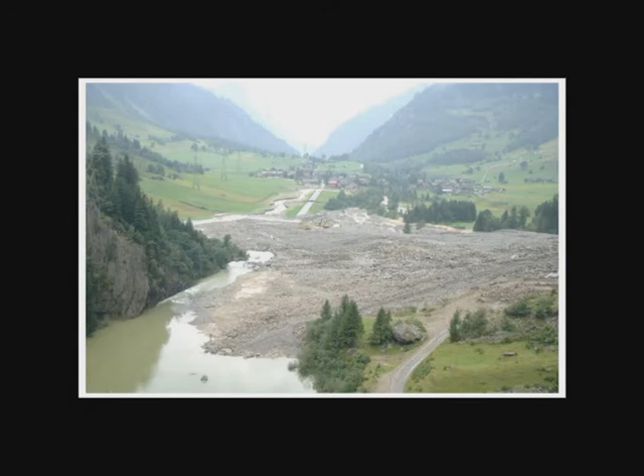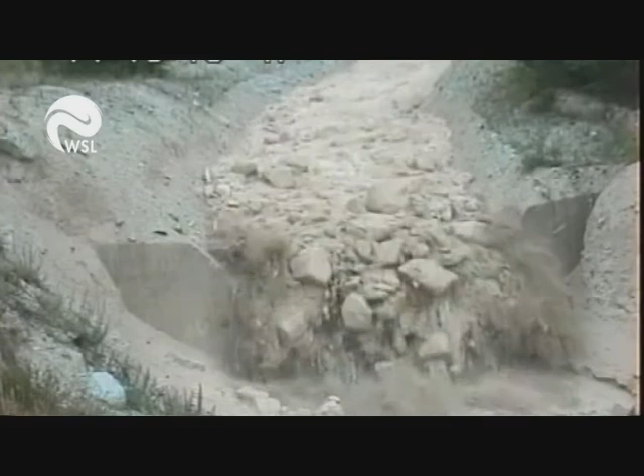The safety of persons and property is constantly under threat in mountainous regions due to natural events such as floods, debris flows, landslides, rockfalls, and avalanches. In just a short time, such events can lead to deaths, injuries, the destruction of property, and ecological damage. Using this combined knowledge and experience, we can verify and further develop scientific theories.

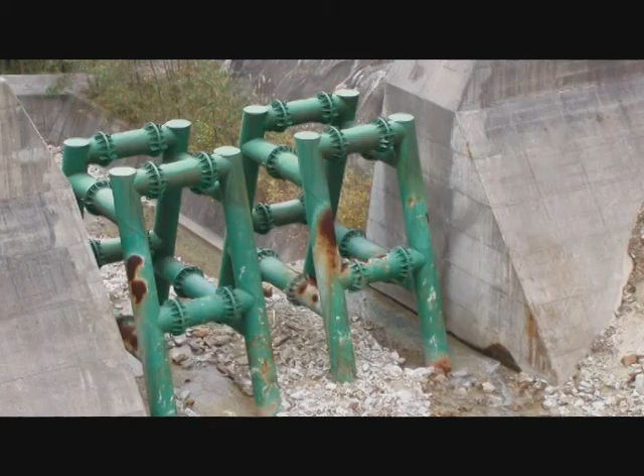A debris flow is a fast-flowing mixture. Various solution concepts exist to reduce the destructive effect of debris flows. For instance, metal girders were installed in a torrent to separate debris and water. But because they are not flexible, they can be easily destroyed by large boulders.

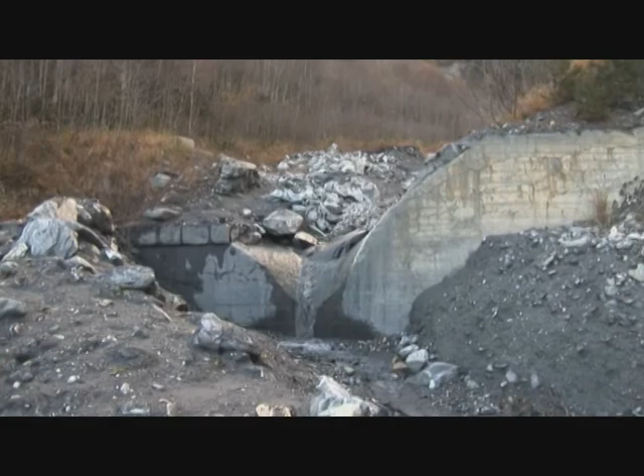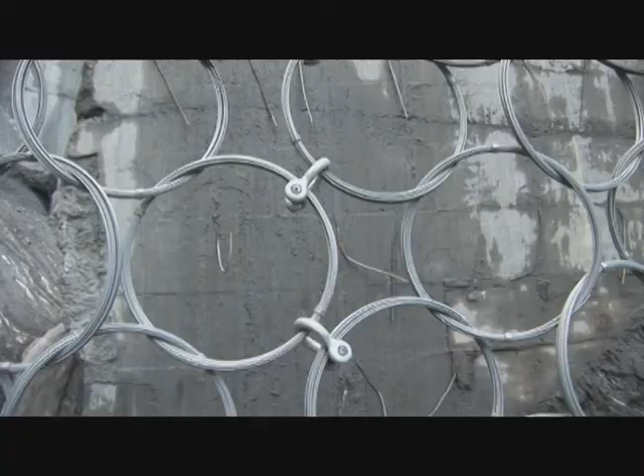Often an attempt is made to stabilize the torrent bed with concrete check dams. The idea is to break the debris flow and thereby reduce its energy. With this system, though, the abrasive effect of the debris results in an unsatisfactory service life. The latest and most promising technique uses ring nets. Just as with a tea strainer, water is drawn off, leaving behind the solids and causing the mixture to come to a stop.

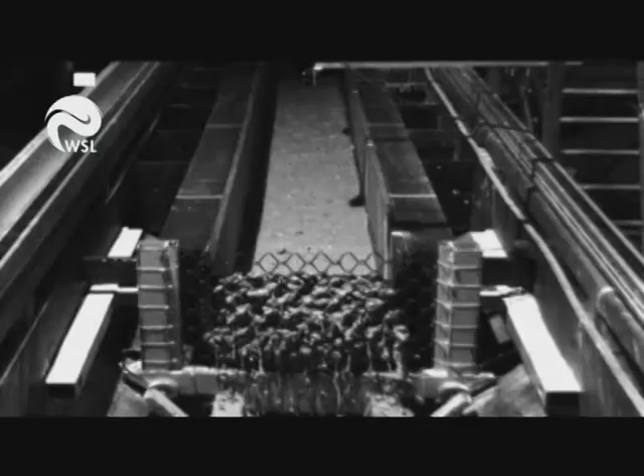Geobrugg in Romanshorn collaborates closely with WSL. It manufactures the world's strongest ring net systems, which have been installed for test purposes in a debris flow barrier. The results from the Illgraben debris flow test site in Switzerland have been positive. The barrier was filled to the brim by a muddy debris flow event, retaining approximately 1,000 cubic meters of debris.

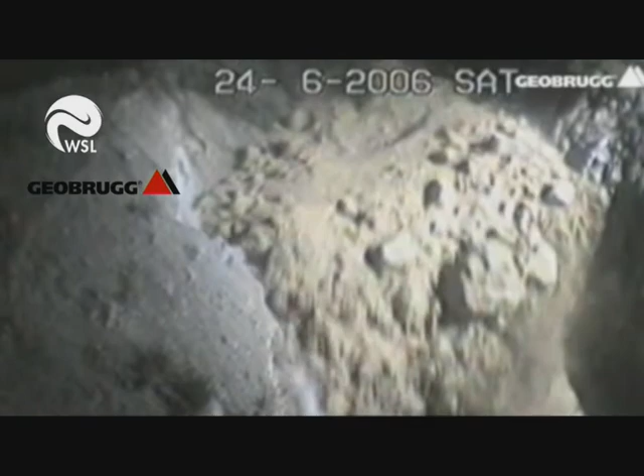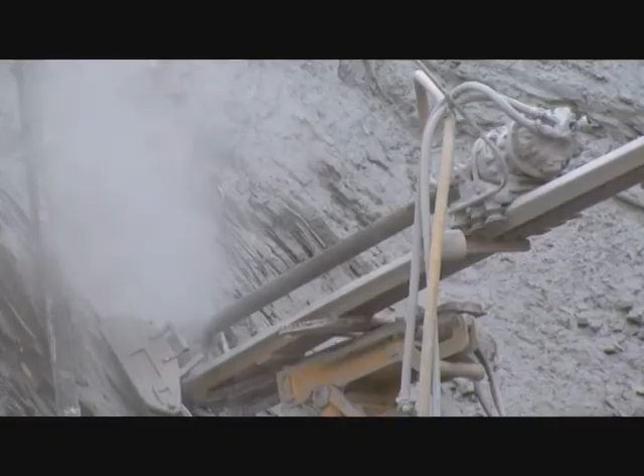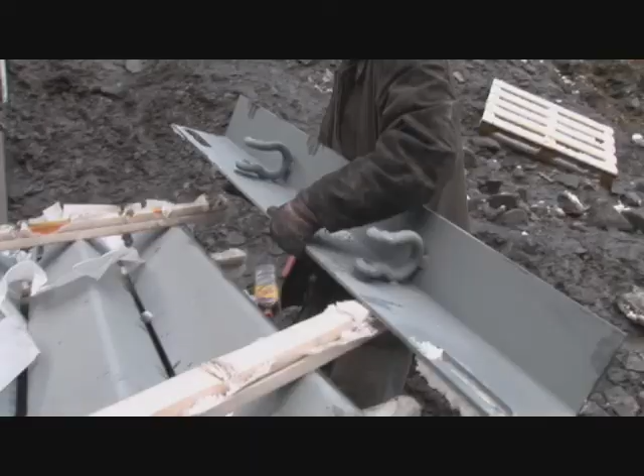The debris flow barrier was filled to excess with several tens of thousands of cubic meters of debris. As was proved, a multi-level barrier arrangement can hold back larger retention volumes. October 2006. On the basis of the successful first test series, a new multi-level barrier was constructed in the Merdenson torrent. It overflows, and the debris flow is captured by the second barrier. Our calculations indicate that we can hold it.

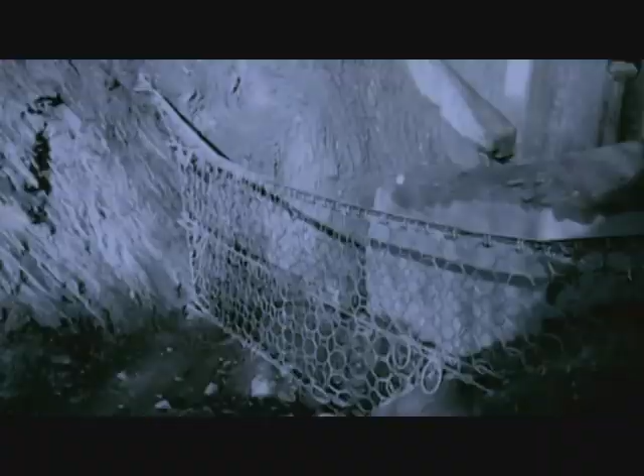Construction is complete. A serious event on January the 1st, 2007. A debris flow thunders down into the valley. Researchers and Matthias Denk from Geobrugg are analyzing the results. We are very satisfied with the results. The event was simulated with Faro software. The calculated data agree well with real-world experience.

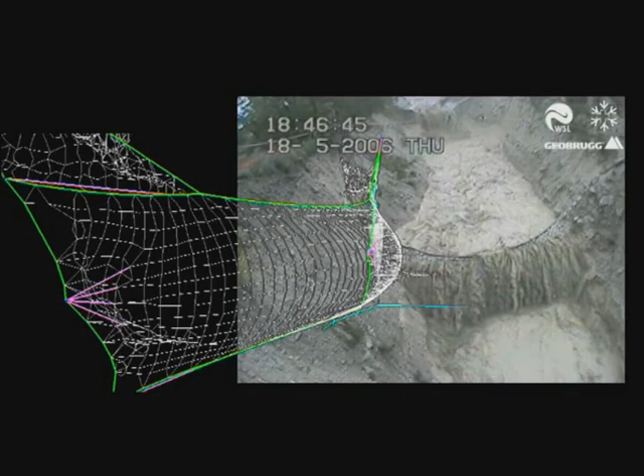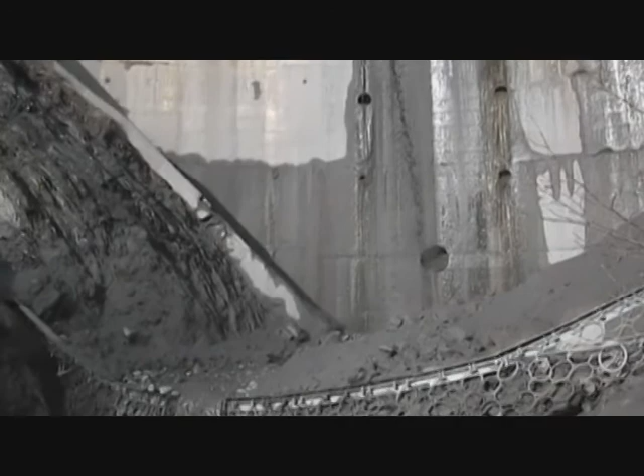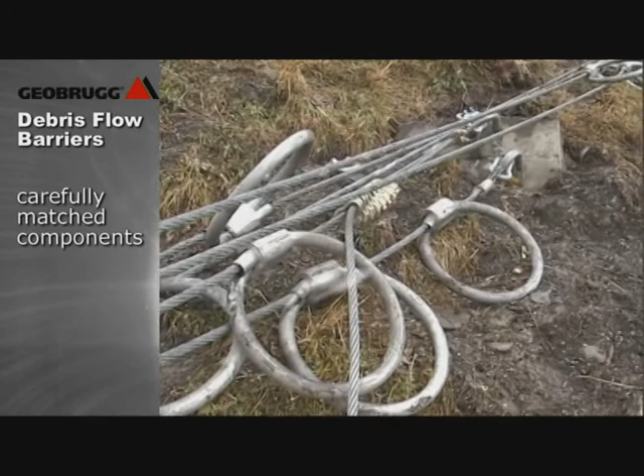The filled Merdenson barriers will not be cleaned out and will serve as protection from undesirable erosion in the torrent bed, in the flanks, and in the foundations of a 10-meter high dam. It is simple and efficient. The special V-shaped flank anchorage, the support ropes, ring nets, brake elements and abrasion protection together form a well-tuned, compact barrier system.

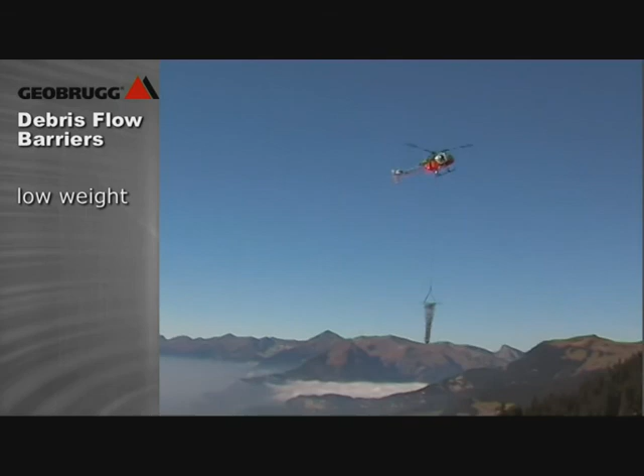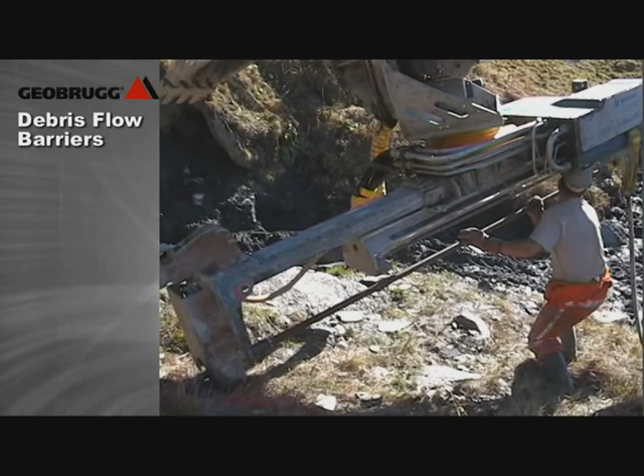The relatively light materials can also be flown in with helicopters and installed in impassable terrain, such as, for example, high up in the catchment area of a torrent. Usually, a torrent does not have to be rerouted or dammed. Drilling work is required only in the flanks. A light drilling rig suffices, enabling anchors to be installed even in difficult soil.

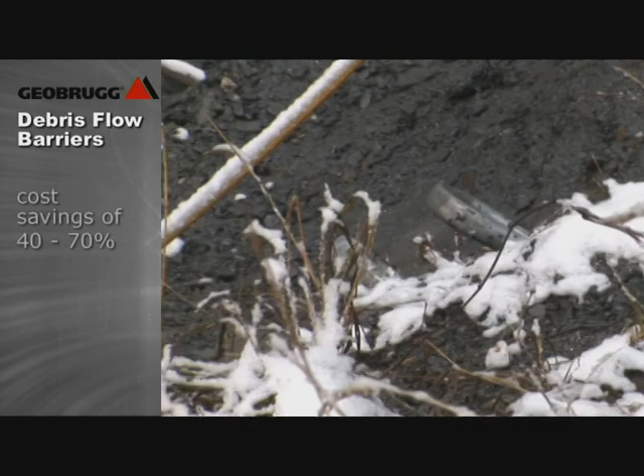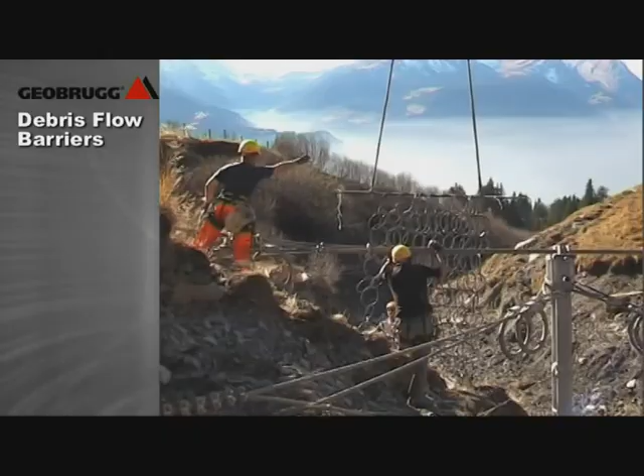In the debris flow release zone at Hasliberg, Switzerland, a multi-level construction with a series of 13 barriers is being built for the first time. This provides a total retention capacity of more than 10,000 cubic meters. An additional advantage is the low visibility of this type of protective measure. It has also proved its worth as a driftwood barrier for preventing stoppages.

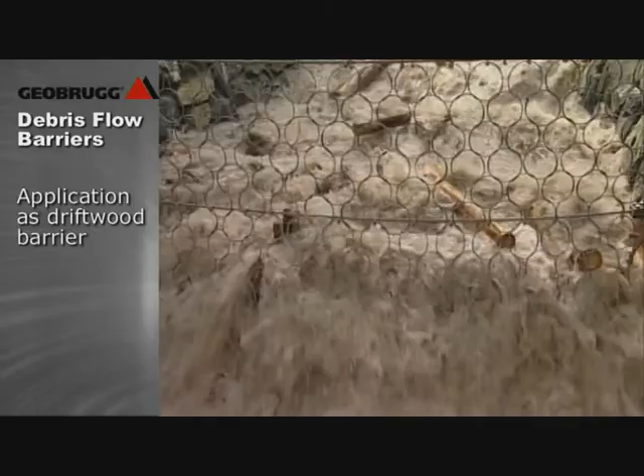After events, filled barriers are simple to empty using a bucket excavator. Each installation can be simulated using Faro software to determine the optimal solution in advance with low dimensioning costs.